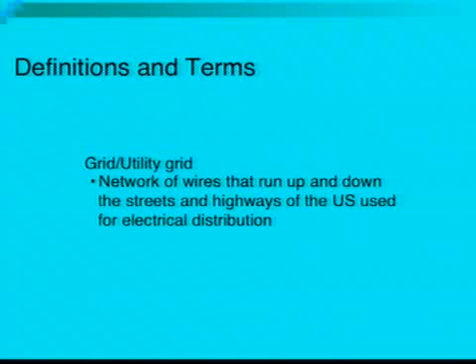So we're all on the same page, we're going to go through some definitions of terms. When I refer to the utility or the grid, I'm referring to the network of wires that go up and down our streets, up and down the roads, that start at the power plant and end at the outlet. And there's 3 of these grids in the United States. There's everything east of the Rockies, everything west of the Rockies, and Texas has their own because they're special.

And so theoretically, you could be an electron, jump on the network here in Lafayette, go up to Canada, go over to Maine, down to Florida, over to Louisiana, and back up to Indiana without touching the ground. So we have this network of wires.

Now, when we create energy with a wind energy system or some sort of energy system, we have to store that energy because we're going to make tremendous amounts of energy in a small amount of time. And we may or may not be able to use that on site straight away. So we have to store it. Well, we can store it in a battery pack, which has its limitations, size, cost, and it's like a giant bathtub. We can only fill it full, and then that's it. We have to shut down the system.

But if we use the utility grid as our battery, in a sense, we can generate electricity, put it into our home, use that on site. Any excess goes out through the utility meter, spins it backwards, and we store it as a credit on the utility, and then those electrons go out into wherever. And then when we need those electrons back, we just buy those credits back from the utility.

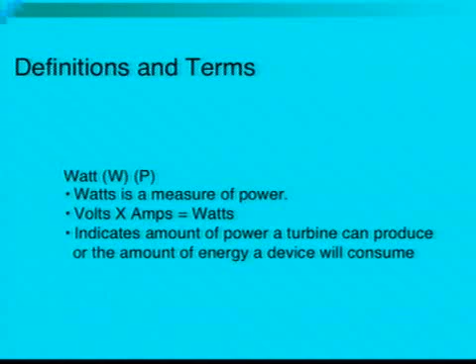Watts is a unit of power, volts times amps, and I'm going to use that interchangeably with kilowatts. And this, as it relates to wind machines, doesn't tell us what it is doing, it's telling us what it can do. Like I say, a 900-watt machine can put out 900 watts, but not all the time. I can say a 10-kilowatt machine is the same as a 10,000-watt machine, or a 5-kilowatt machine is the same as a 5,000-watt machine. So I'm going to use those interchangeably.

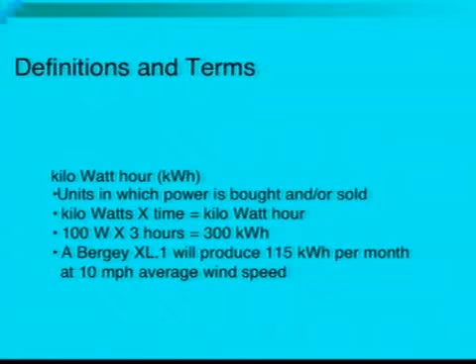Kilowatt hours, that's the units that we buy and sell electricity in. Anyone know what they pay a kilowatt hour from the utility? 5 to 12 cents. 5 cents, utility looks pretty good. 7? Anyone else? 7.8. Renewables have a hard time competing with cheap electricity. So there's going to be other reasons we might want to put renewables in.

I've talked to people that have paid as little as 4 cents down in southern Indiana, must have been on TVA or what have you, and as high as 32 cents in Illinois from Commonwealth Edison. And I just had a lady in my class who works for Northwind, a wind company, and she's working with Alaskans who are paying up to $1 a kilowatt. It's all diesel-based generators. So when you're paying $1 a kilowatt hour, renewables look really good. So kilowatt hours is what we buy and sell electricity in, or store electricity in.

So how are we going to quantify how much energy we use on a monthly basis or a yearly basis? Anyone? Get your electric bill out. Every month, the utility company sends you a bill. Then you know exactly how much you consume. So tonight, you're going to march right home, get in the door, and dig through the drawers and get 12 months of utility bills. And you're going to add them all up, get a grand total. That's going to be your annual load in kilowatt hours.

So when we size the machine, which we'll do in a little bit, we'll look at our annual load. We need that number. The second number we need to know is what our wind speed is. What is our resource? What is the annual average wind speed at your location? And at what height? So if you look at the screen, we have information. This is from our data collector from our site. This is at same longitude, same latitude, different heights.

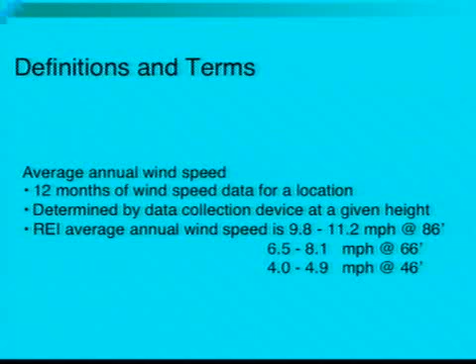So at 46 feet, we have between a 4.0 and a 4.9 mile an hour wind, average annual. At 66 feet, we have 6.5 to 8.1 miles per hour. And at 86 feet, 9.8 to 11.2 miles per hour. So average annual wind speeds, same longitude, same latitude, different heights. So just by looking at those numbers, what can you say? What can you determine?

Higher you go, faster the wind speed. The wind speed is your fuel. If you want more fuel, go higher. So if we look at the equation, the power equation, as it relates to wind, P, power, is equal to half the density of the air times the swept area of the rotor. Swept area of the rotor is you have 2 or 3 blades on a machine. It's how much surface area does it cover, the whole rotor disc. So if you have like a 10-foot rotor, it's the whole square footage that it covers.

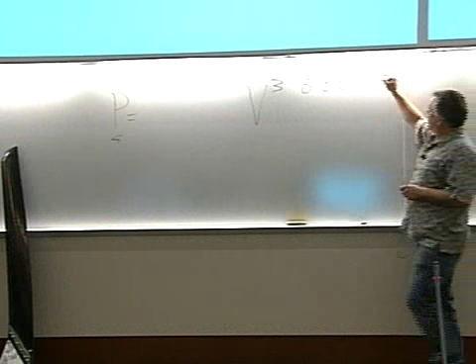Swept area. So we have power is equal to half the density of the air times swept area of the rotor times velocity of the wind cubed. All right. So if we want to get more power out of a machine, we can fart around with the formula here. Can we change the density of the air? No. Can we change the swept area of the rotor? Sometimes, with consequences. More on that later. Can we change the velocity of the wind? Or can we? We can increase the velocity of the wind if we go higher.

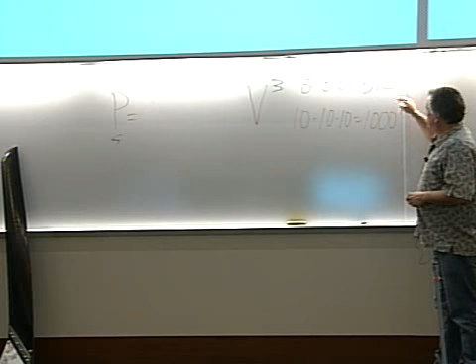What if we have an 8 mile an hour wind? It'd be 8 times 8 times 8. What is that? 512, I believe. Versus going to a wind that's 10 times 10 times 10. What's that? 1,000. So by increasing by just 2 miles per hour, we can, I'm sorry, double our energy that's in the wind.

So it's far cheaper to add on tower sections than it is to size for a larger machine. So in a sense, if we can get even higher, we can reduce the size of the machine, reduce the cost of the system by adding more tower sections on. All right? Getting into the fuel. Fuel's not down here where we live. Fuel's up high. In Wisconsin, entry-level tower used to be 80 feet. Then it went to 100 feet.

And then the Focus on Energy program kicked in. The state incentive program came, and that's production based. If you want reimbursement from the state to buy down the cost of your system, then you have to produce more energy. What's the easiest way to produce more energy? Taller tower. So now we're seeing 120, 140, 160 foot towers, because that's where the fuel is. Same machine, more energy. So I'm going to give you some resources on where to find the wind speed for your longitude and latitude and at a given height, so you can do your research.

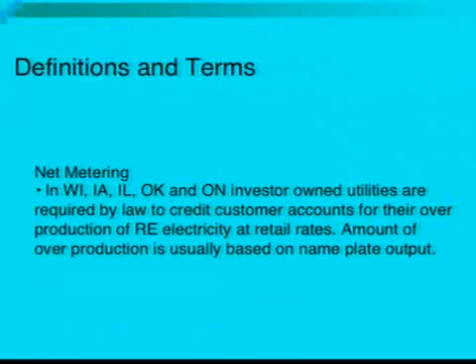Net metering. All investor-owned utilities in the United States are required by federal law to allow you to hook up to their system and store energy on their system at a rate that's equal to what you pay. So we're going to buy electricity at, say, 10 cents a kilowatt hour. We're going to generate electricity and store the excess energy on the investor-owned utility at the same rate, 10 cents. So we're going to have this equal exchange.

However, co-ops, REAs are not required to do that. Municipalities may not be required to do that. And it varies from state to state. Now, that's federal law, and each state is different. Each state is going to limit your production based upon capacity. What is the potential capacity of a wind machine or your system or systems? And in some cases, they're going to limit your production on an annual basis. You can maybe only do a certain percentage over your annual use. But in general, it's going to be based upon output rating.

Indiana is limited to 10 kilowatts: a 10 kilowatt wind machine, 10 kilowatts of solar, or a combination of the above. Up to 10 kilowatts, you fall into net metering law. Once you go over 10 kilowatts of rated capacity, and that says nothing about what you can produce. Remember, this machine's rated capacity is what? 900 watts. Doesn't tell us what it's going to produce over a period of time, just a nameplate rating.

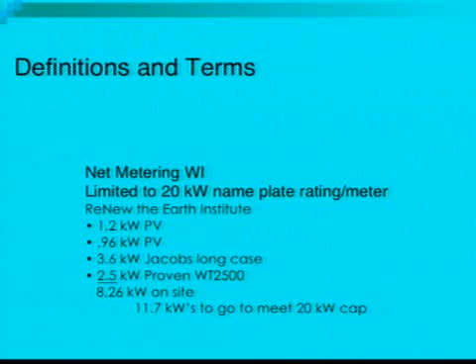Actually, I think I have the laundry list here. And about another kilowatt of PV on that meter. So if you add that all up, I think that comes up to about 8 kilowatts of something. And we can fill it up with another 11 kilowatts of something. That meter's done then. And then on the site, we also have 3 more meters that we could fill up.

We can fill another meter up with 20 kilowatts, fill up the other 2 remaining meters with 20 kilowatts each as well. So once we fill that meter up, we're done. We have to move to the next one, the next one, and the next one. Once in a while, there's different ways to skin a cat. How are we doing? Questions?

Good? Can you add a second meter and split between two? You can't have one windmill powering back into 2 meters. No, you can't have one wind machine feeding into 2 meters. Not doable. You can't have one machine feeding 2 households. That would be essentially 2 meters as well. You can't have a shared one. You'd have to have a central power source, power system.

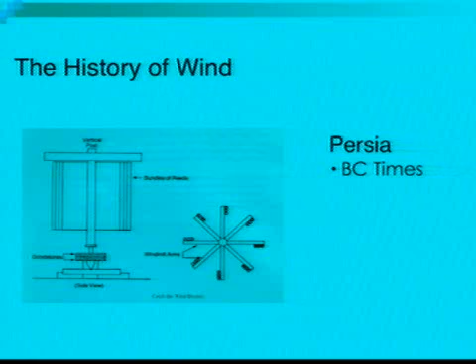Short history on wind. I throw this section in there to get you to think about wind energy. This isn't new. There's nothing new about this. This is over 2,000 years old, been around for ages. And we'll see some of these designs, over 2,000 years old, come back again and again into the conversation.

Back in BC times, the Persians took a vertical shaft, put reed bundles around it, wind pushed on one side of the rotor, pulled the other side of the rotor through the wind, and they were able to grind grain. Slow-moving machine, did a really good job of grinding grain and pumping water. Great for what it was meant for. Over 2,000 years old. The European Crusaders saw that technology and took it back to Europe, moved it into a horizontal axis, and they used it for the same purposes, grinding grain, pumping water, irrigation.

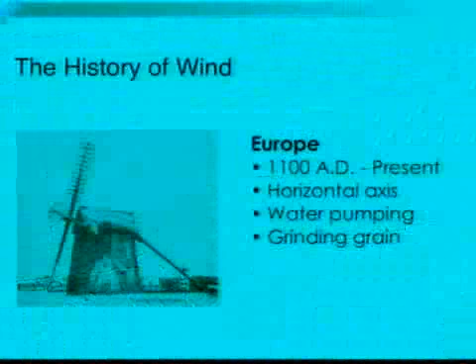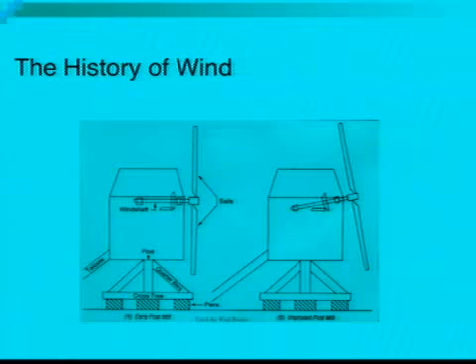But on the house at the top of the tower, they had to rotate that around. So you'll see there's a pole coming off the backside, that's a tail pole. You and 6 of your friends would grab onto that pole and orient the rotor into the wind. And then eventually they put a huge giant bull gear up on top and a smaller rotor. Then the smaller rotor would automatically rotate the big rotor into the wind. And this is 1200, 1300 AD. These guys had their act together. Very simple technology. The simplest machines are the ones that are going to last the longest.

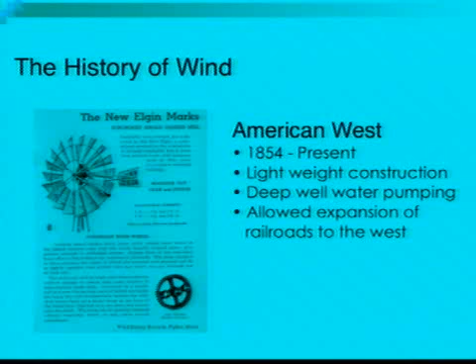Fast forward to the American West. Americans were pushing out into the Western Plains, and they had two things that needed water: the steam locomotive and cattle. Where was the water? The water was down deep. Thus the deep water pumping system. Millions of these were sold. You can still buy them today. And that's what allowed us to expand out to the west.

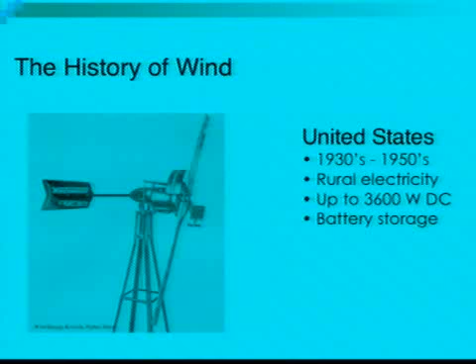Fast forward to World War I. Most of the United States was rural. Most of the rural United States had no power lines going out to them. The soldiers went out to Europe to fight the war, saw the lights of Paris, and wanted that technology back home. And at the same time, the automobile came out, which had a generator, the airplane, which had a prop, and the battery-powered radio, which allowed you to have contact with the outside world.

So the soldiers came back home, started messing around with what was available. They put a generator on a water pumper, produced a little bit of energy, powered up a battery. Then they put a prop from an airplane onto a generator and produced tremendous amounts of energy. Then they had something. People developed this system and powered up rural America. Many farms in the United States were powered up by wind power in the 1920s, 30s, 40s, and 50s.

You'd buy a wind machine, a great big giant battery pack, DC appliances for the farm, for the barn, and for the home. And this is bulletproof engineering, very simple, very straightforward and practical engineering. And I actually paid more for this brochure than that wind machine cost originally. Just absolutely brilliant.

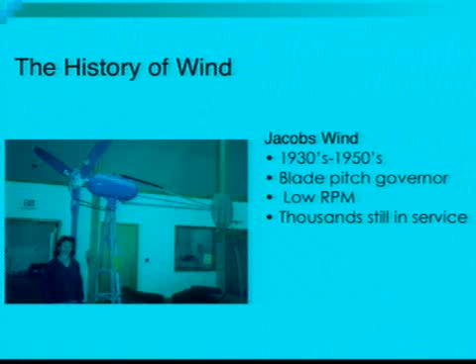This is the Jacobs wind machine, the long case, originally built in Prior Lake, Minnesota by the Jacobs boys, Marcellus and the other one. And this is the benchmark of all wind machines today. Very simple, heavy-duty, slow RPM machines which produce lots and lots of energy.

This machine was built originally in 1942, and the one behind our office, there's a 100-foot tower with a machine just like it on the tower, originally built in 1948, still putting out energy. I know a guy who has one built in 1941. They don't manufacture these anymore, but you can still get them.

The guy that has the 1941 machine, bearings froze up, got in there, pulled the covers off, sprayed lubricant into the bearings, rocked the rotor, broke it free, forced grease into the bearing. It's still running on the original bearings from 1941. Just bulletproof machines. But this is the benchmark for all machines that are out there now.

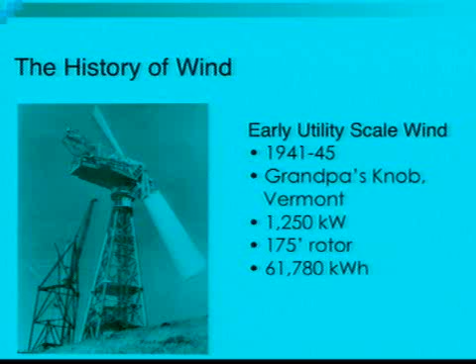Back in the 1970s, 1980s, there were over 70 different wind manufacturers in the United States. Now there's 5 in the United States. And those machines are the ones that are based upon the simplicity of the Jacobs machines.

This is Putnam's machine that he and those guys built in the 1940s, 1.2 megawatt machine, two-bladed machine, metal blades. What happens when you move metal back and forth? It hardens up, fatigues, and breaks off. Well, that's what happened. Each blade is 8 tons. Blade flies off. There was a metal shortage, so they couldn't get enough metal to fabricate a blade till after the war.

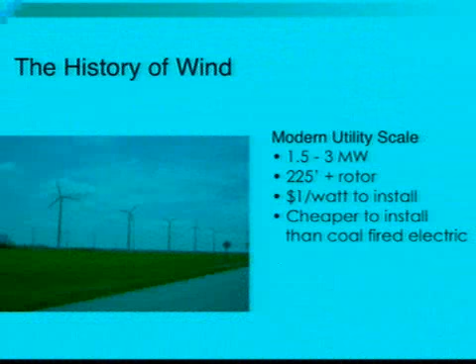Remanufactured a blade, put it on, and then the other one broke off. And then they just abandoned the site. But we never saw a machine of this size or caliber until the 1990s. They were way ahead of their time. And now we have the modern wind machine.

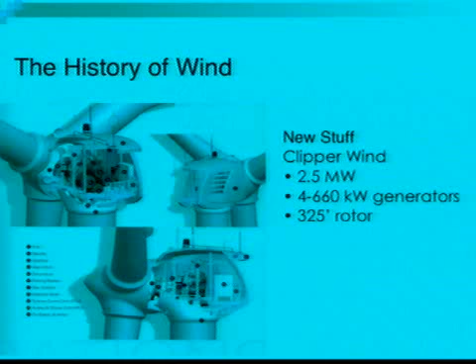One big generator up in the house. Clipper Wind in Iowa just came out with this design 2 years ago-ish. Instead of one giant generator up in the top, they have 4 small generators in the house. And if one fails, they can take it out and put a new one in, but the whole machine isn't shut down. New idea, a better mousetrap.

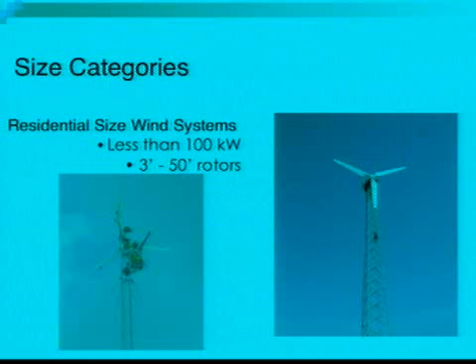For the purpose of this discussion, we're going to limit our discussion to machines that are 100 kilowatts and less. So we're talking about rotor diameters of 3 feet all the way up to 50 feet. That's a huge broad range. We're going to break them up into smaller, more manageable sections: cabin charging machines, whole home machines, and then small commercial type machines.

Why 100 kilowatts? Well, there had to be a line somewhere. And the North American Board of Certified Energy Practitioners determined that 100 kilowatts on down is going to be considered small wind. So NABCEP, if you want more information, go to nabcep.org.

This is a nonprofit based in New York, and they administer certification for solar electric installers, solar water installers. Now they're working on wind electric installers as well. They just got done with the criteria for what you need to have for background to sit for the test. Now they have to develop a test, and that's probably going to take a year and a half. So we won't see a certification for installers for maybe 2 years. nabcep.org if you want more information on that.

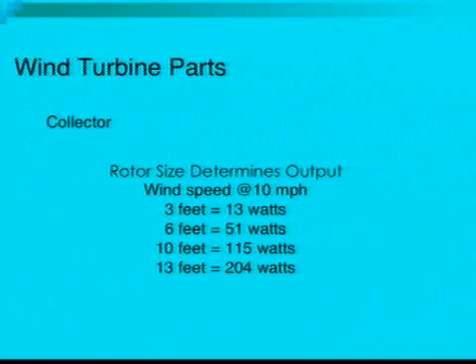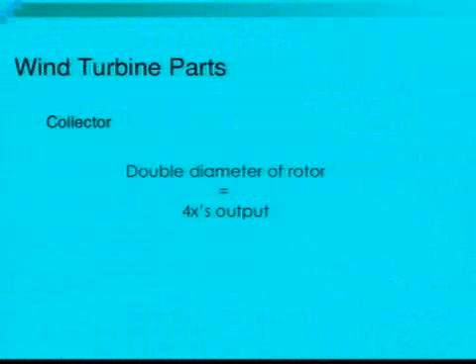And if you look at Piggott's chart, he says that at a 10 mile an hour wind speed, doesn't matter what height, a 3-foot rotor should put out about 13 watts, a 10-foot rotor about 115 watts, a 13-foot rotor about 204 watts, and so on. So at the same wind speed, the larger the rotor, the more surface area there is, the more you can harvest out of that wind. All right? And there are going to be strategies that manufacturers use to get more energy.

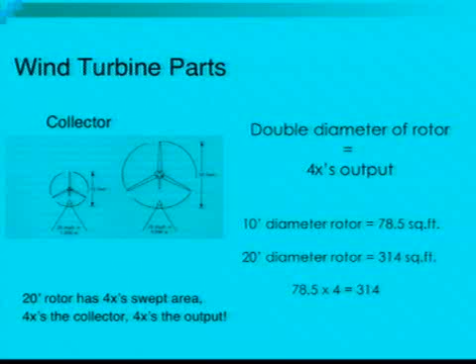And if we double the diameter of the rotor, we're going to get 4 times the output of the machine. Why? Well, pi r squared. If we go from a 10-foot rotor, pi r squared, we have 78.5 square feet. We double that rotor size to a 20-foot rotor. The square footage is 314 square feet, or 4 times the swept area. And if we have 4 times the swept area, we're going to have 4 times the output.

This chart is from Ian Woofenden's article in Home Power. Oh, by the way, an added bonus feature to this publication in front of you: I pulled out all the good wind articles that relate to different subjects, and they're right behind each section of the PowerPoint, about 3 or 4 in each section. I think this is one of them.

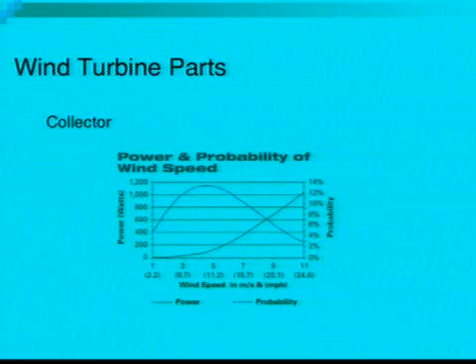So in this chart, the big bell-shaped blue line is the frequencies of wind. We have more frequent winds from about 7 to about 12 miles per hour than all the others. The light winds, not very much. The heavy winds, not very much. So our wind machine has to live and work in the 7 to 12 mile an hour range. That's where our most frequent winds are. Yeah, we're going to have heavy winds, but we're going to have more of the lighter winds that we have to deal with.

So if rotor diameter is everything about output, let's talk about this. Here's a blade off a 900 watt African Wind Power. This blade is off the 900 watt Whisper, this machine right there. Which machine is going to produce more energy? Which blade? This one. Why? Because it has the largest swept area. So we now have 2 machines rated at the same output with different rotor sizes.

So this machine, which is going to put out more energy on an annual basis because of these lighter winds that we have, these mediocre winds, it's going to have more production in those winds than this machine right here. All right. So what the manufacturer or the designer, Hugh Piggott, says is, I want to get more production off this machine. So it's operating in lighter, mediocre winds. I want to take advantage of that, oversize the rotor. More on this machine right here.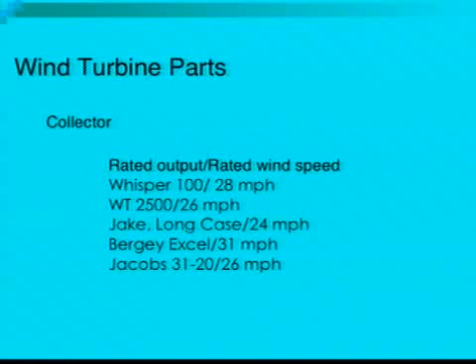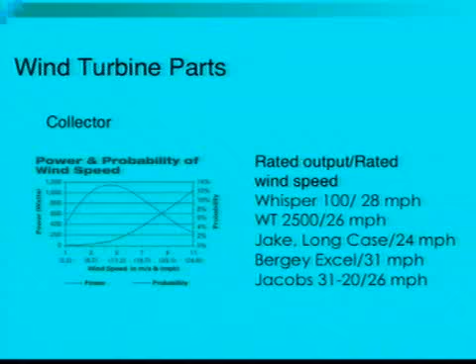Here's the rated output of various machines and at what wind speed. So like the Whisper 100, that machine will reach 900 watts output at about 28 miles an hour. The Bergey 10 kilowatt, the Excel, it's going to put out 10 kilowatts at about 31 miles per hour, and so on and so forth. Oh yeah. So that's where the rated outputs are taking place. But if we look at this chart, here's where those numbers are taking place. Those numbers don't happen. These wind speeds aren't as frequent as these mediocre wind speeds. This is where the wind machine is going to be living most of the time.

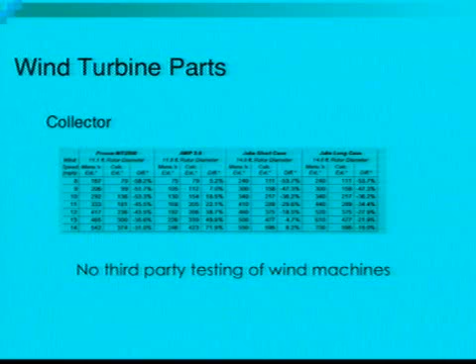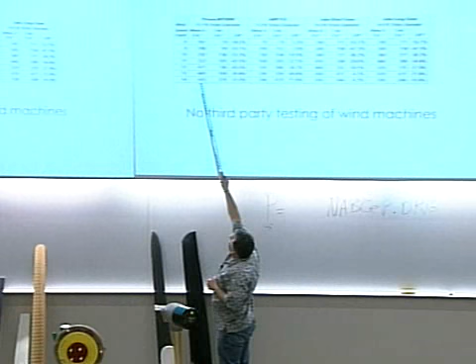This chart here is out of a larger article called Apples and Oranges, which I highly suggest that you go home tonight and go to homepowermagazine.com, go into their archives and pull up the Apples and Oranges article. It's about 70 pages long. This chart is from that. The article was last updated in 2002, and there's a later version of that in the back of this section called Wind Turbine Buyer's Guide, where they evaluate wind machines.

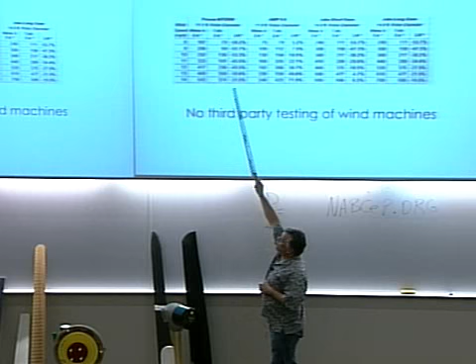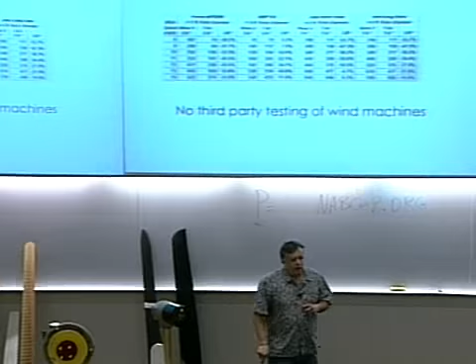So they took all the wind machines that were available at that time, and here's the average annual wind speeds, what the manufacturer says that machine should produce at those average annual wind speeds, and then mathematically the authors calculated out what those machines should do, and then the difference. Huge difference. So the manufacturer is telling you one thing, and reality is a different thing. So we have Disneyland and reality. Unlike solar electric and solar hot water, there's no third-party testing of wind machines. So whatever a manufacturer says, you got to take it with a grain of salt. It could be true, it could not be true. The only one that was accurate was the African Wind Power. Why is that accurate? Well, they have an oversized rotor on that machine.

Just incorporated a year ago February is the Small Wind Certification Council. You can go to their website. They're not up and going yet, but they're going to provide independent third-party testing of all wind machines in the United States based upon European standards. There was this bickering back and forth of how machines were going to be tested. And they just said, well, we're just going to do European standards. We're not going to test the Bergey standards. We're not going to test the Southwest Windpower standards.

We'll do European standards. So just like when you buy a refrigerator or a hot water heater, you're going to have a sticker on the wind machine, and that's going to tell you four things. It's going to tell you what is the peak output of the machine, the kilowatt hours production at various wind speeds, and these will be tested.